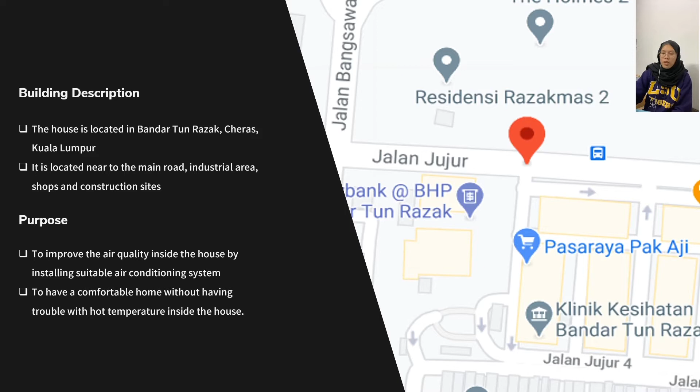Let's start with the building description. The house is located in Bandar Tun Razak, Cheras, Kuala Lumpur, and it is located near the main road, industrial area, shops, and construction site. The purpose of installing the air conditioning system for this house is to improve the air quality inside the house by installing a suitable air conditioning system, and to have a comfortable home without having trouble with hot temperature inside the house. This is the floor plan selection for the terrace house.

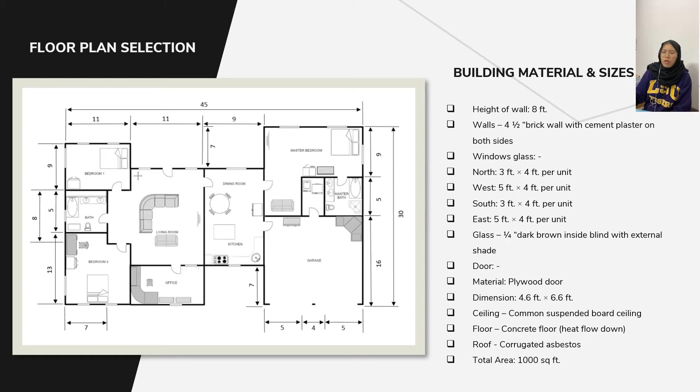The height of the wall will be 8 feet and the walls will be brick wall with cement plaster on both sides, and the glass will be dark brown with internal blinds and external shade. The material for the door will be plywood door, and the dimensions of the door will be 4.6 feet by 6.6 feet. The ceiling will be a common suspended board ceiling. The floor used will be concrete floor. The roof will be using corrugated asbestos. And the total area for the floor plan is 1,000 square feet.

Now comes the second part, which is the methodology. In this part, I will be explaining about the method for calculation, the procedure, and the assumption of design.

Now let's look at the method for calculation. The first method for cooling load estimation is the cooling load temperature difference method. For this method, the corresponding temperature difference is used to measure the temperature difference, the immediate external cooling load over a wall or roof, the outside temperature differential, daily temperature range, solar radiation, and heat storage in building infrastructure mass can also be determined by using this method. This method is also influenced by orientation, tilting, month, day, hour, latitude, and others.

As you can see in this slide, the figure is showing an example of the cooling load estimation table.

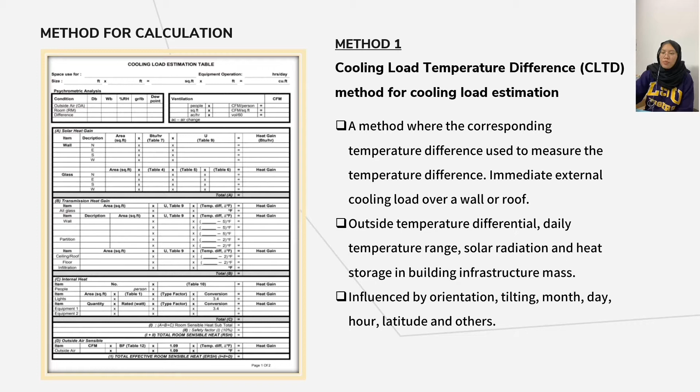The second method is the equal friction method for duct design. This method is important in order to choose the main duct velocity and duct sizing consistent with good practice from a point of view for a specific building or application.

The steps for this method are: first, calculate the value of supply air CFM for each room in the proposed house plan. Second, calculate the number of diffusers. Third, find the throw radius of each required diffuser. And fourth, plot the graph and find the pressure drop. At the left side of the slide is the formula used for this method.

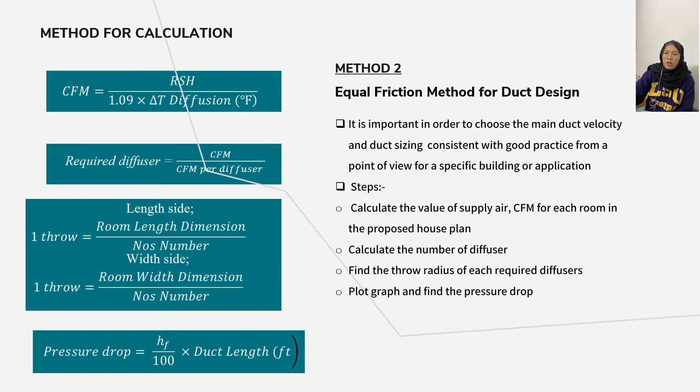Now let's talk about the procedure. The procedure starts with the house plan drawn complete with its dimensions and poles. Next, determining the material and dimensions of the wall, windows, door, ceiling, and others. Then, total cooling load estimation for each room is calculated by using the cooling load estimation table.

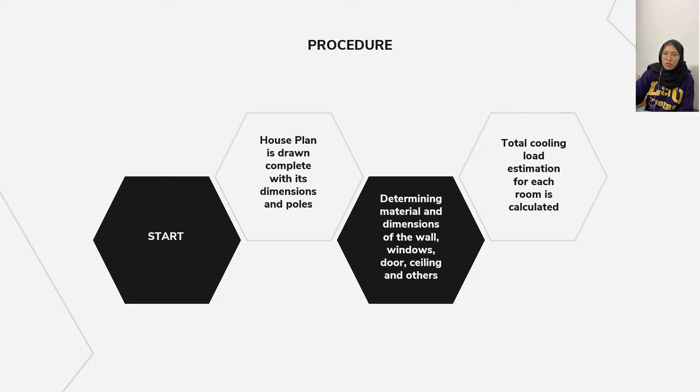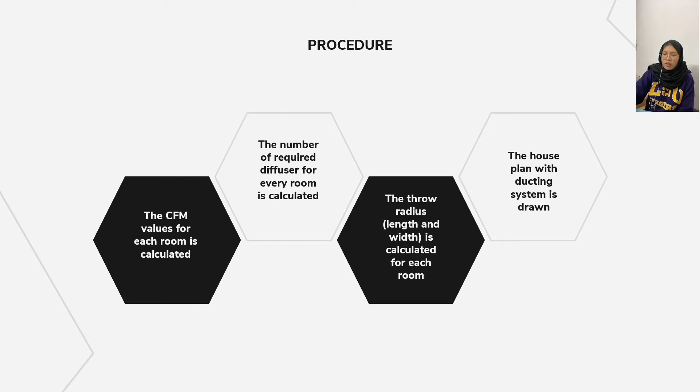Next, the CFM values for each room are calculated by using the formulas. The number of required diffusers for every room is also calculated by using formula. Next, the throw radius, the length and width, is calculated for each room by using formula. The house plan with ducting system is drawn later after the throw radius has been determined.

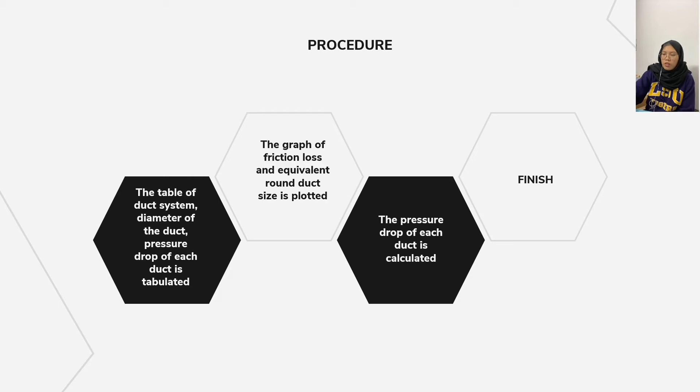Then the table of duct system, diameter of the duct, and pressure drop of each duct is tabulated. Then the graph of friction loss and equivalent round duct size is plotted. And last but not least, the pressure drop of each duct is calculated.

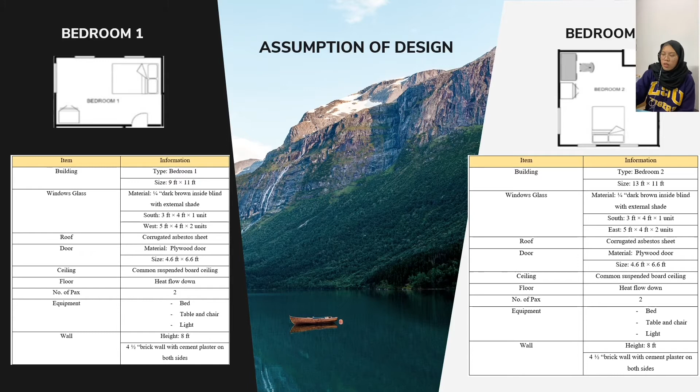For bedroom 2, the size of the bedroom is 13 by 11 feet. The number of pax in this bedroom is 2, and the equipment in this bedroom is bed, table and chair, and light, same as bedroom 1.

For the living room, the size is 16 feet times 15 feet. The number of pax in this living room is 7. The equipment in this living room is sofa and television.

For the office, the size is 11 feet times 7 feet. The number of pax is 1 and the equipment in this office is table, chair and laptop.

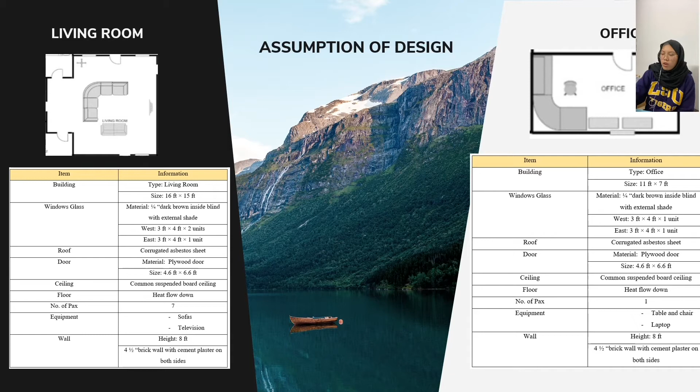For the master bedroom, the size is 14 feet times 14 feet. The number of pax is 2 and the equipment in this room is bed, sofa and television.

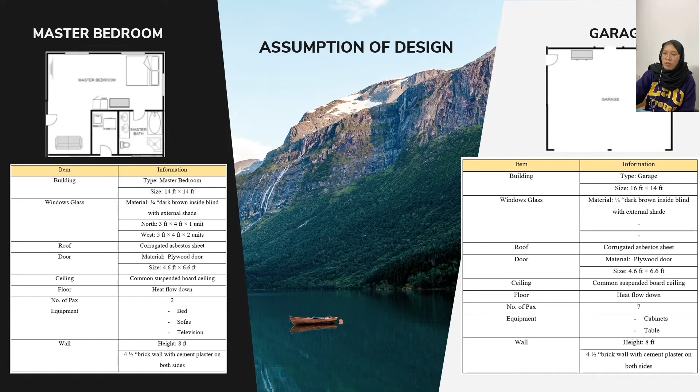For the garage, the size is 16 feet times 14 feet, the number of pax is 7, and the equipment is cabinets and table.

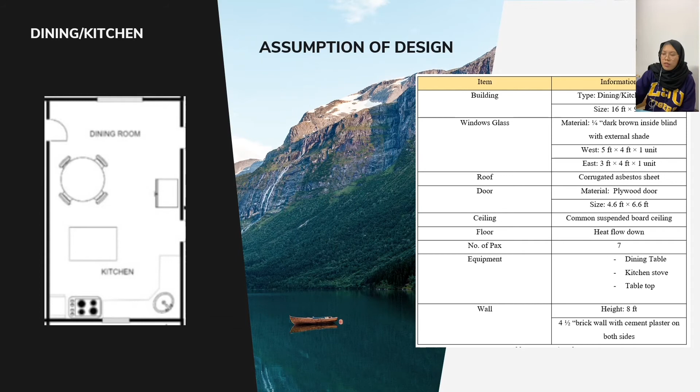Lastly, for the dining and kitchen area, the size is 16 feet times 9 feet. The number of pax will be 7 and the equipment is dining table, kitchen stove and tabletop.

Now comes the next part, which is the result and design. In this part, I will first be showing you the table of cooling load calculation, calculated in the assignment before by me and my colleagues. This table of cooling load estimation,

this table is used to find the grand total heat and will be used to calculate the BTU per square feet, to calculate the CFM, and others. So as you can see in this slide, the first

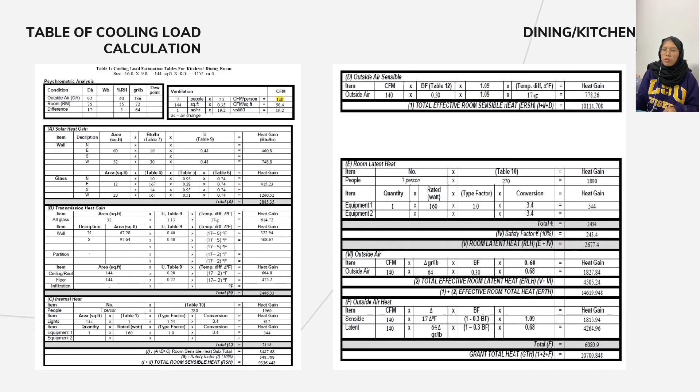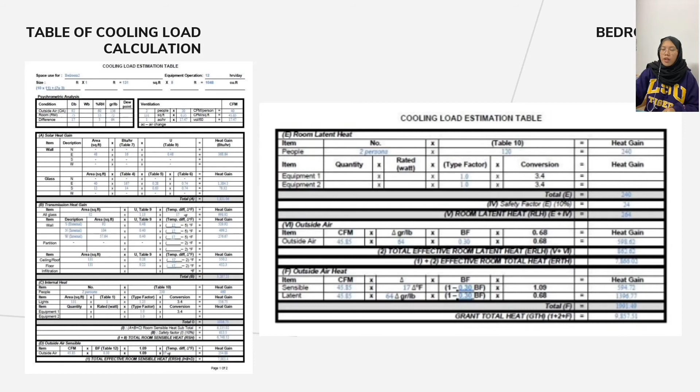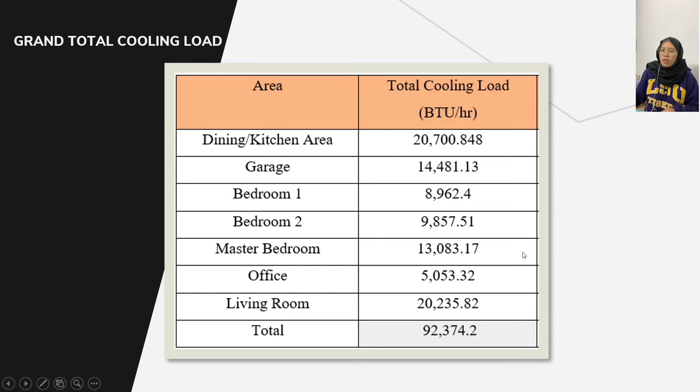From the cooling load estimation table, as I have shown just now, I could calculate the total cooling load in BTU per hour, which I gained about 92,374.2 for every room in the house plan that I have proposed.